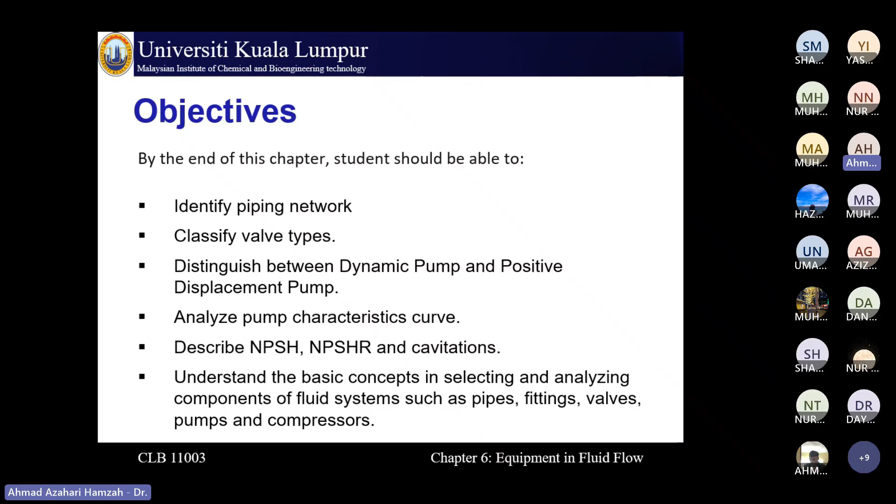Pipes are circular in cross-section and available in widely varying sizes, thicknesses, and materials of construction. Normally galvanized iron, PVC, and also stainless steel.

Pipes are used to transport fluid from one place to another.

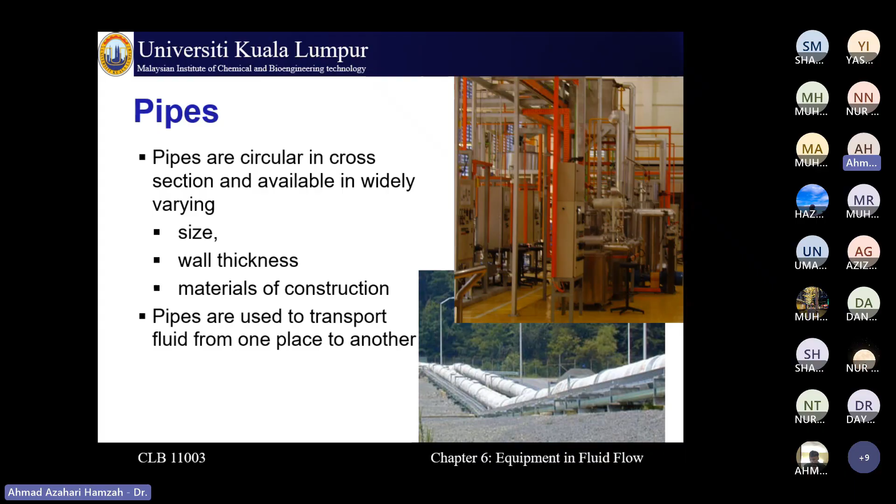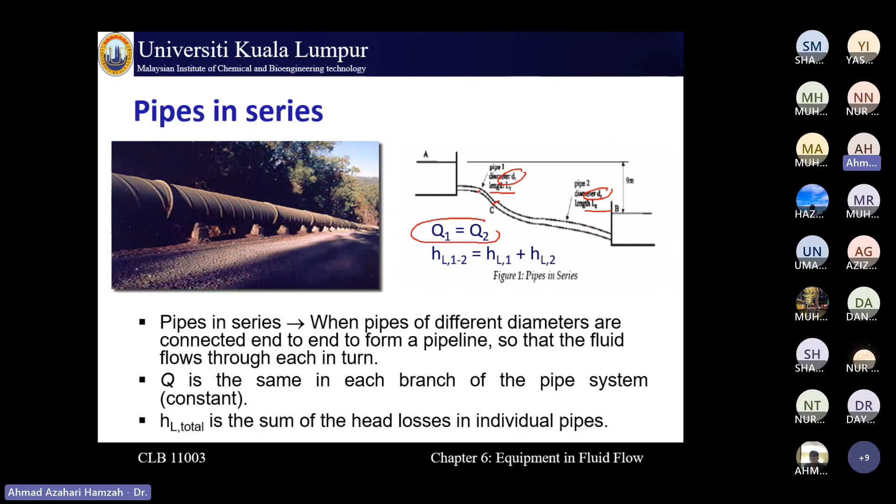Pipes in series: when pipes of different diameter are connected end to end to form a pipeline so that the fluid flows through each in turn. So we have pipe 1 with diameter D1 connected with pipe 2 with diameter D2, pipe 1 length L1, pipe 2 length L2. The flow rate Q is the same in each branch of the pipe system, where Q is constant, Q1 equal to Q2. The total head loss is the sum of the head losses in individual pipes: HL total equals HL1 plus HL2.

Pipes in parallel: when two reservoirs are connected by two or more pipes in parallel, the fluid can flow from one to the other by a number of alternative routes. So here we have two routes, pipe 1 and pipe 2, in a parallel configuration. Q total is the sum of the flow rates in the individual branches, so Q1 plus Q2 equals Q total.

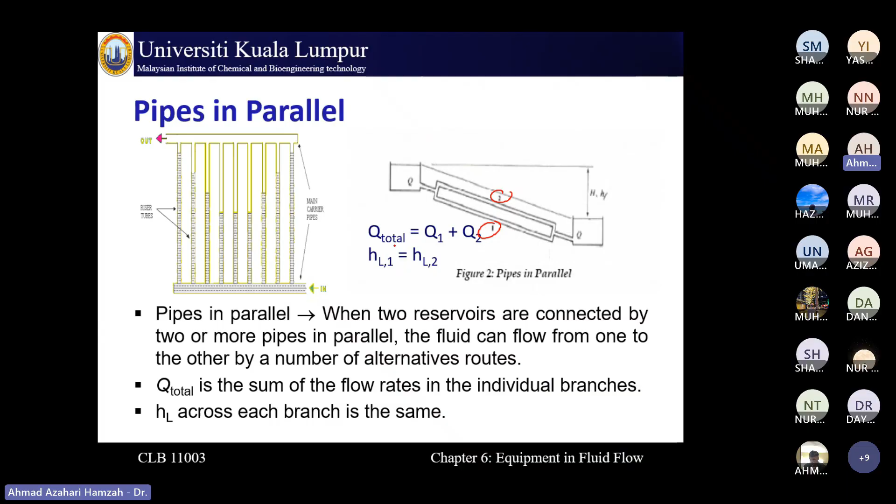And the head loss across each branch is the same: HL1 equal to HL2. Head loss for pipe 1 equals head loss for pipe 2, but the total flow rate Q equals Q1 plus Q2.

For the piping network with parallel pipes, we perform control volume analysis between point A and B. This is the Bernoulli equation: PA over rho G plus alpha1 UA squared over 2G plus ZA equals PB over rho G plus alpha2 UB squared over 2G plus ZB plus HL. The velocity at point A equals the velocity at point B, so we can cancel out UA and UB, and for the same elevation, ZA equals ZB.

In the end, we get HL equal to PA over rho G minus PB over rho G, or in short, HL equals delta P over rho G. Since delta P is the same for all branches, the head loss in all branches is the same, so HL1 equals HL2, where HL equals F times L over D times U squared over 2G — this for pipe 1, this for pipe 2.

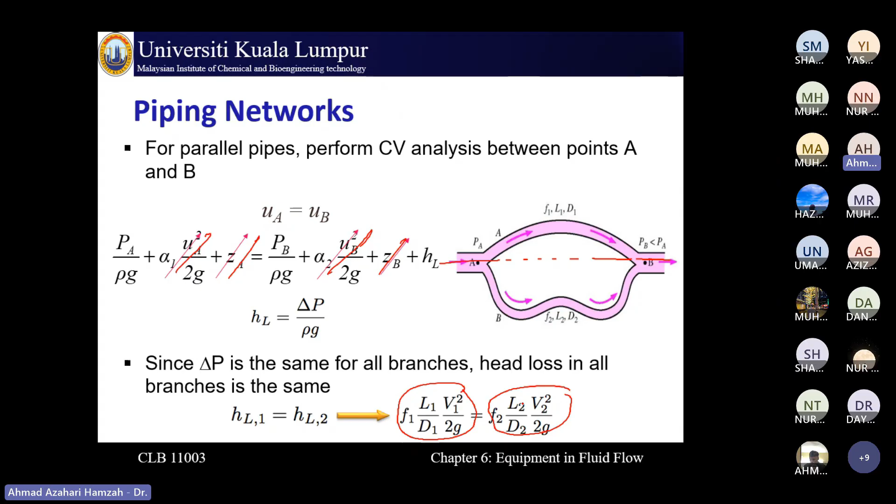Moving to the valve: a mechanical device that regulates the flow of fluid by opening, closing, or partially obstructing various passageways.

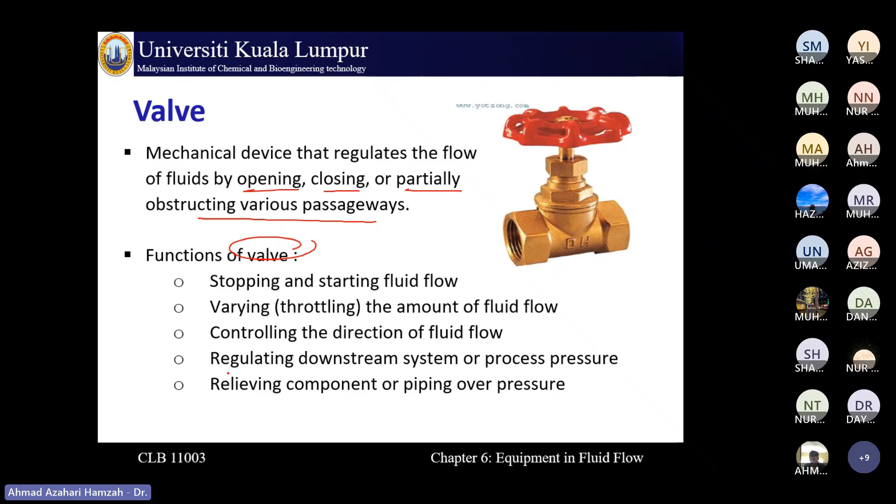Functions of a valve: stopping and starting fluid flow, varying or throttling the amount of fluid flow, controlling the direction of fluid flow, regulating downstream system or process pressure, and relieving component or piping overpressure. So we have two types of valves: stop valve and check valve.

Stop valve and check valve. A stop valve is used to shut off or partially shut off the flow of fluid, controlled by the movement of the valve stem.

A check valve is a mechanical valve that permits gases and liquids to flow in only one direction, preventing process flow from reversing. It's a one-way direction valve — fluid flows in the desired direction to open the valve, while backflow forces the valve closed.

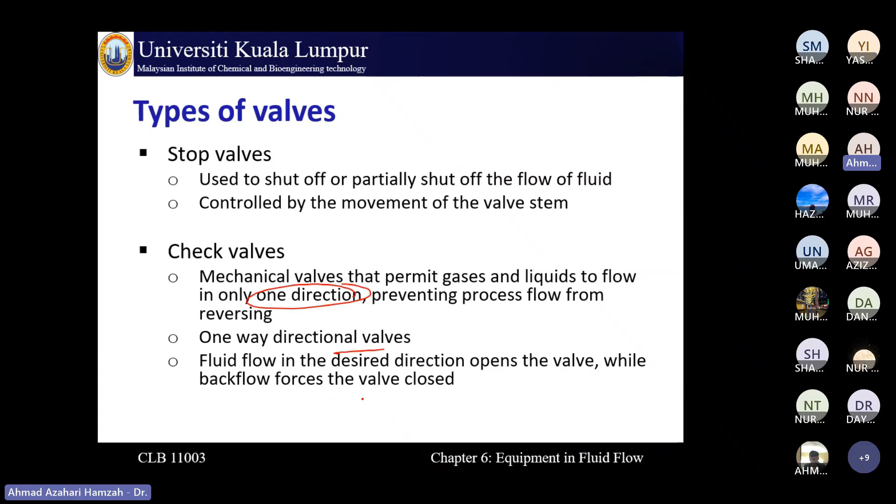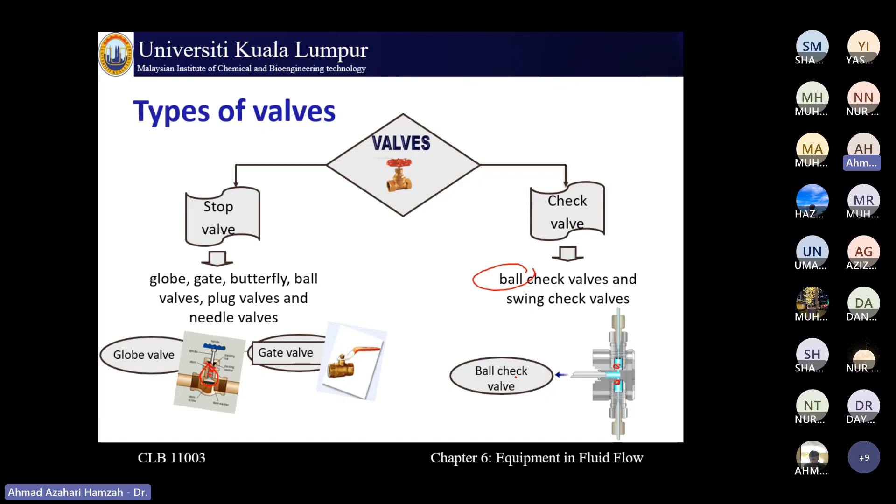A globe valve is a one-way direction, linear motion valve with rounded bodies, consisting of moving parts — the valve stem and hand wheel. Commonly used for on-off service and handles throttling applications, good for regulating flows.

Advantages of the globe valve: precise throttling and control, and high pressure limits. Disadvantages: low coefficient of flow, and it's not a good selection for applications requiring cleanliness or sterility.

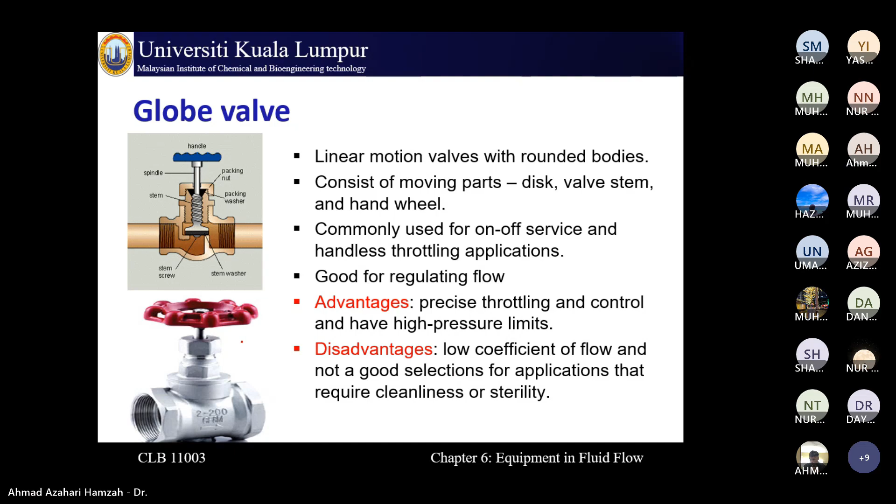A gate valve is used when a straight line flow of fluid and minimum restriction is desired. This is commonly seen at dams, mainly for on or off control with low pressure drop. Not suitable for throttling purposes.

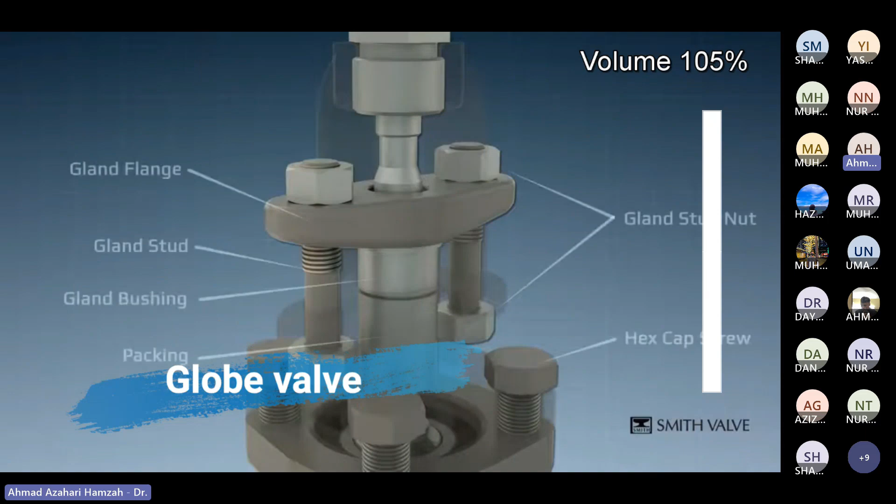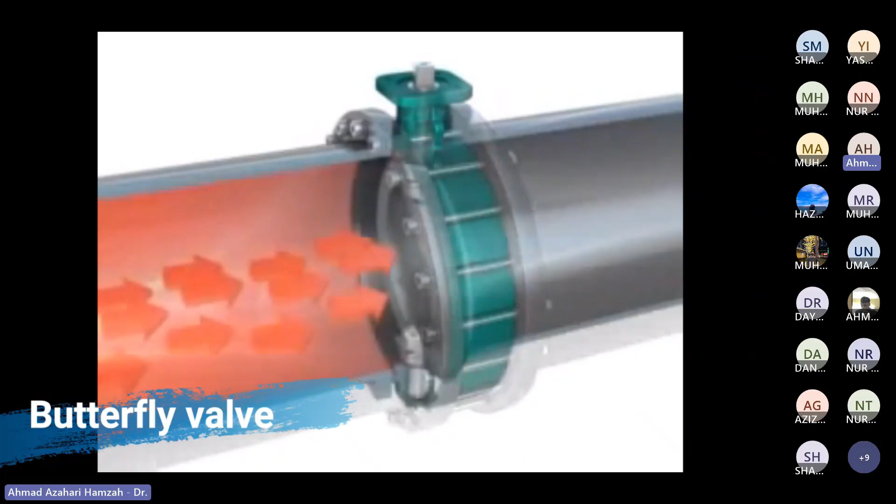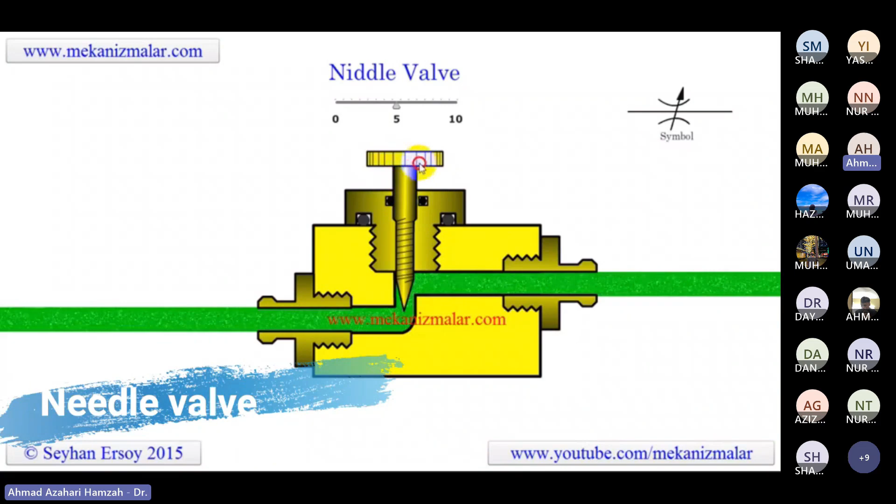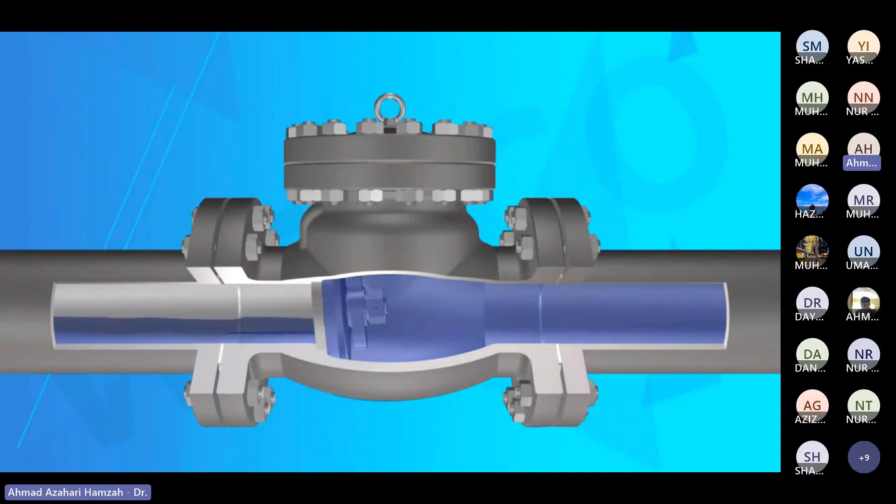This is a stop valve, so a globe valve is under the stop valve category. Okay, that is a type of valve.

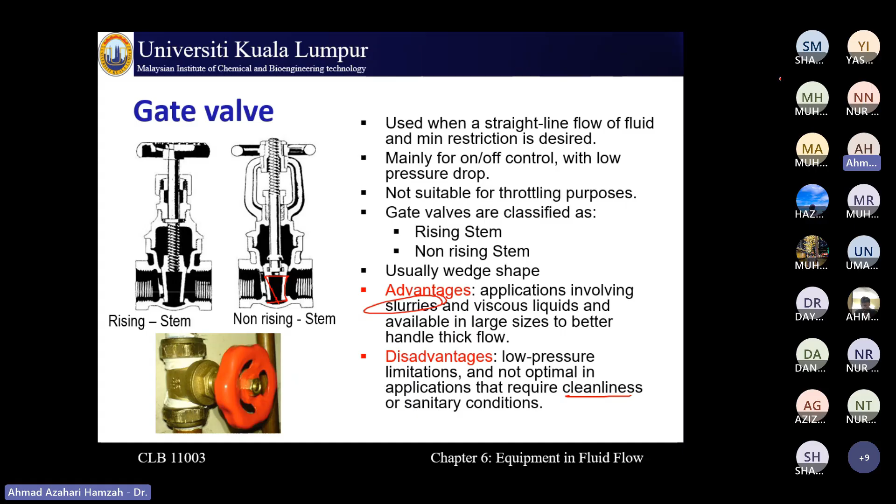Now move to the pump. Two types: dynamic pump and positive displacement pump. For dynamic, we have centrifugal pumps, and for positive displacement, we have plunger and gear pump. A pump is a mechanical device that moves fluid by pressure or suction.

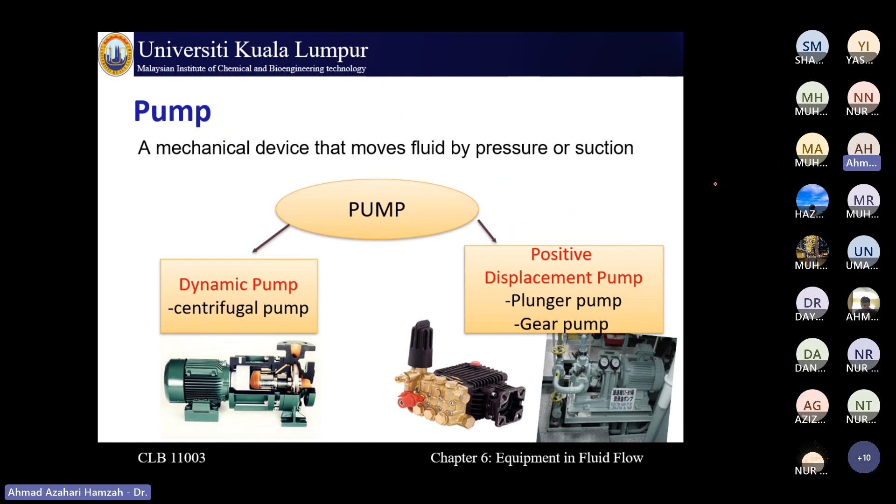It uses the momentum of the fluid to move it across an unsealed chamber. We have 3 types of dynamic pump, including centrifugal pumps. Fluid enters axially and discharges radially - that one is the centrifugal pump.

Axial pump: fluid enters and leaves axially, going in and out the same way. And mixed flow pumps: fluid enters axially and leaves at an angle between radial and axial, so it comes out at that angle - that one is the mixed flow pump.

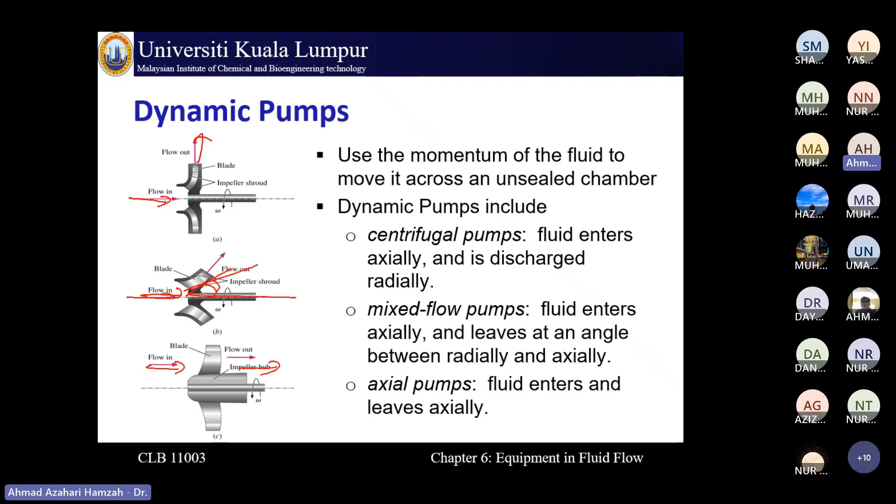Two main parts for centrifugal pump: rotating element which moves - impeller and shaft, with the shaft holding the impeller. And stationary element, we have casing, stuffing box, and also bearing.

Suitable for low viscosity fluid that can withstand a moderate amount of shear. That is why in our lab we use water. So normally we just use the centrifugal pump, except for experiment number 6, where we have gear and plunger pump, but still have the centrifugal pump as well. For the rest, normally we use centrifugal pumps.

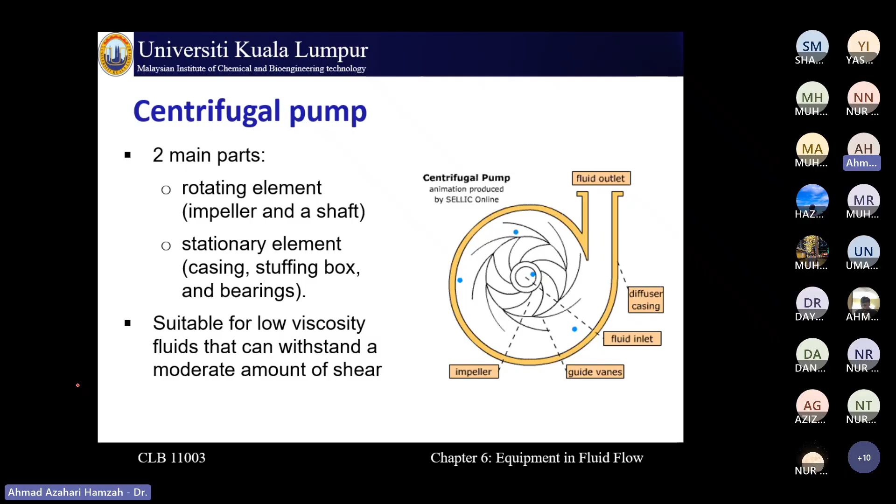Operating principle: operates using kinetic energy to move fluid, utilizing an impeller and a circular pump casing. The impeller produces liquid velocity and the casing forces the liquid to discharge. Liquid enters, the impeller spins until it hits the vanes and goes out. It enters the pump near the center of the impeller and moves outward by the rotating motion. The vanes on the impeller progressively widen from the center of the impeller, spinning further out until it exits.

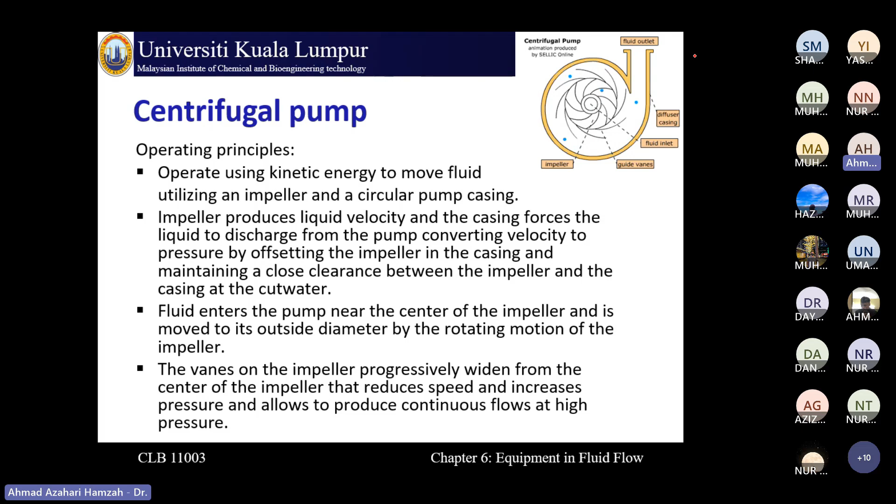Positive displacement pump forces fluid from one sealed chamber to another with little leakage. Examples of positive displacement pump: rotary and also plunger. Rotary is the gear type, which is used in experiment 6, both pumps. Suitable for higher viscosity liquid or when pressure requirements are high. That is why for experiment 6 we use water, and next we have oil in the tank.

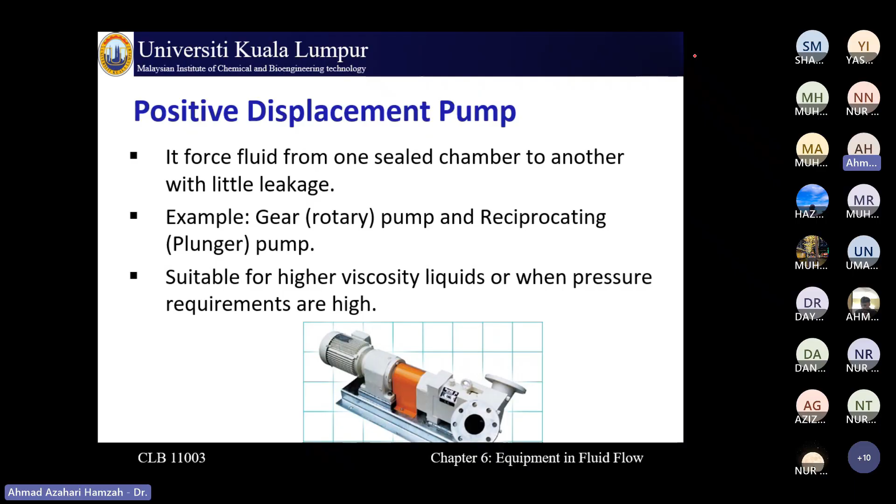Alright, gear pump operating principle: uses two identical gears rotating against each other. One gear is driven by a motor, and in turn it drives the other gear. So only one uses the motor, the other moves because it is being driven.

Each gear is supported by a shaft with bearings on both sides of the gear. There's a shaft, there's a bearing - without the bearing, it can't move. As the gears come out of mesh - this mesh we call a cavity -

they create an expanding volume on the inlet side of the pump. Liquid flows into the cavity and is trapped by the gear teeth as they rotate - gear teeth, cavity, and so on. Liquid travels around the interior of the casing in the pocket between the teeth and the casing, and finally, the meshing of the gears forces liquid through the outlet port under pressure.

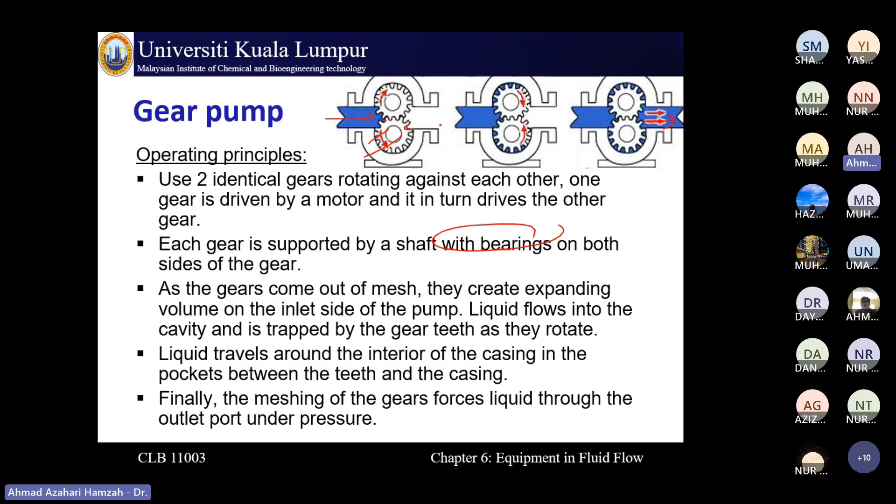It goes in, then goes out through here. This is the function and operating principle for gear pumps - this is how it operates: going in, moving to the teeth, and going out.

Reciprocating pump uses a plunger to move the media through a cylinder chamber. That's why it's called a plunger, reciprocate. We have a cylinder chamber here. It draws in fluid when the plunger rod retracts into the cylinder bore, and discharges the fluid when the plunger rod extends.

When it's pulled, it opens, water goes in, once full, it closes, water comes out. There's a valve here, and another one to open, with a ball. When the plunger is pulled out and increasing volume is formed within the cylinder, the ball check valve at the inlet port allows fluid to enter and fill this void.

After the cylinder is filled, the plunger is pushed in, pushed back, and the ball check valve at the inlet closes, while the ball check valve at the outlet port unseals or opens. A decreasing volume is formed within the cylinder. This action positively ejects the fluid out of the outlet port. So it goes in, opens, fills up, closes, then the other one opens and it comes out.

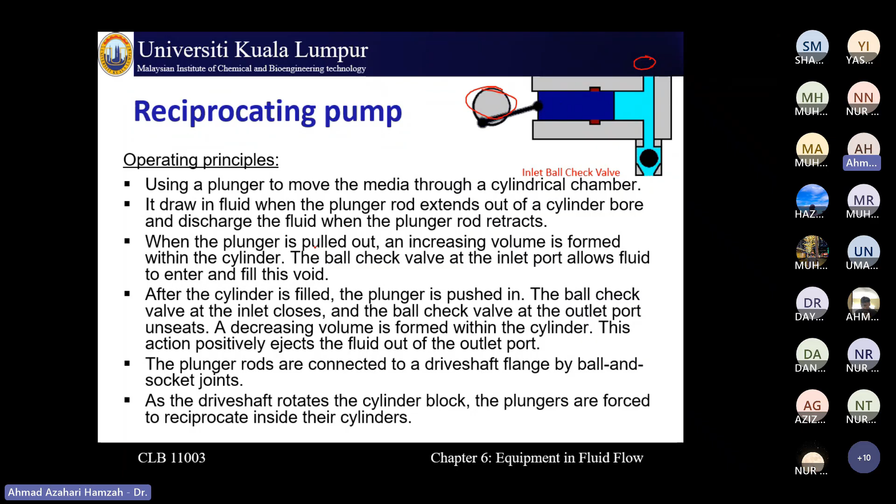The plunger rod is connected to a drive shaft flange by ball and socket joint. This drive shaft has a ball and socket joint holding the rod. As the drive shaft rotates the cylinder block, the plungers are forced to reciprocate inside their cylinders.

There are two types of pumps: reciprocating and centrifugal pumps. Advantages of reciprocating pump over centrifugal: it can be designed for higher head than centrifugal pump.

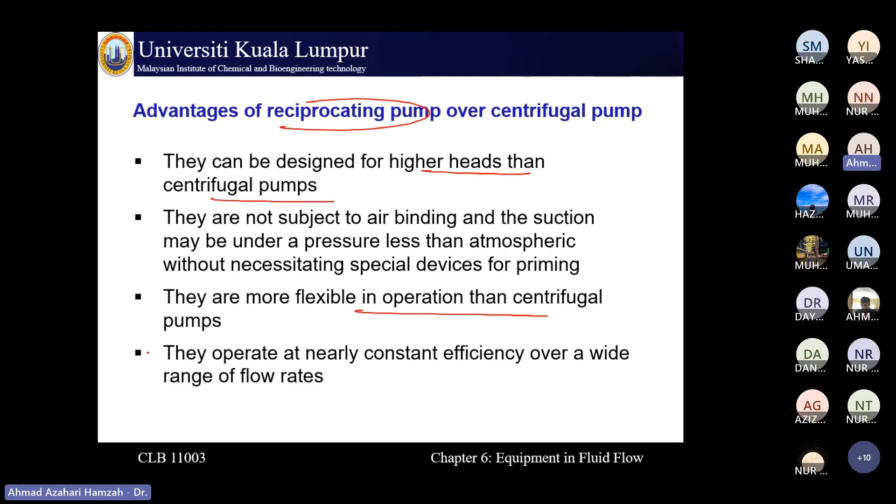They are not subject to air binding, and the suction may be under a pressure less than atmospheric without necessitating special devices for priming. They are more flexible compared to centrifugal pump and operate at nearly constant efficiency over a wide range of flow rates.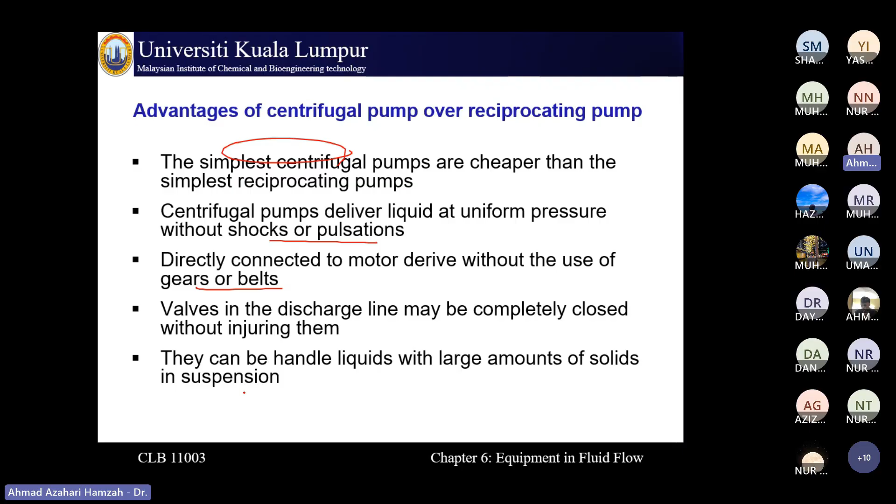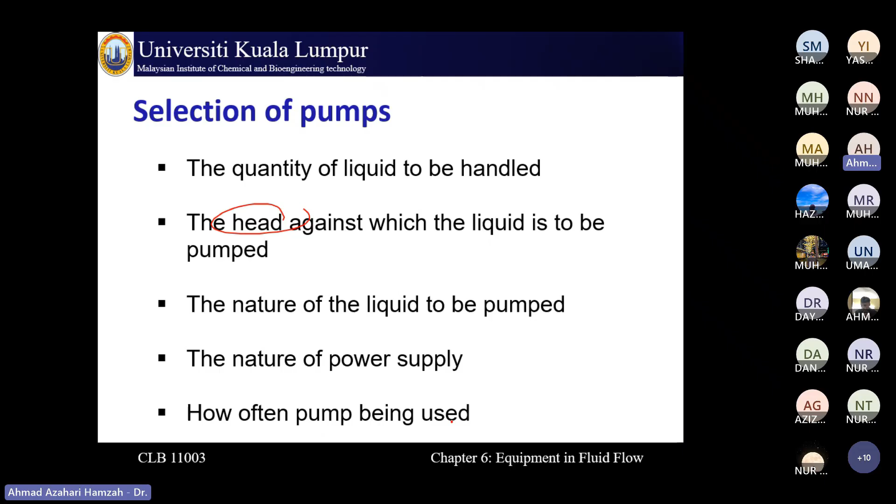Before selecting a pump, you need to understand the quantity of liquid to be handled, the head against which the liquid is to be pumped (height), the nature of the liquid to be pumped, types of liquid, whether slurry, for wastewater or normal use, the nature of power supply - AC, DC, etc, sometimes blackout and so on, and how often the pump is being used. For 24 hour use it needs to be heavy duty.

Next is performance characteristic curve. The delivered Q is dependent on P, delta P over Q. If the required pump P is high, the resulting Q will be low. High delta P, low Q. If Q is high, the pressure is low. At low pump P, the Q is high.

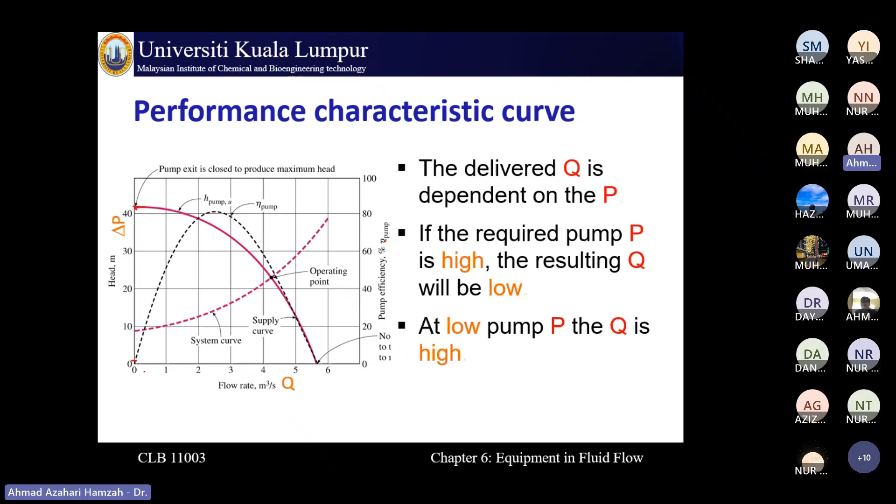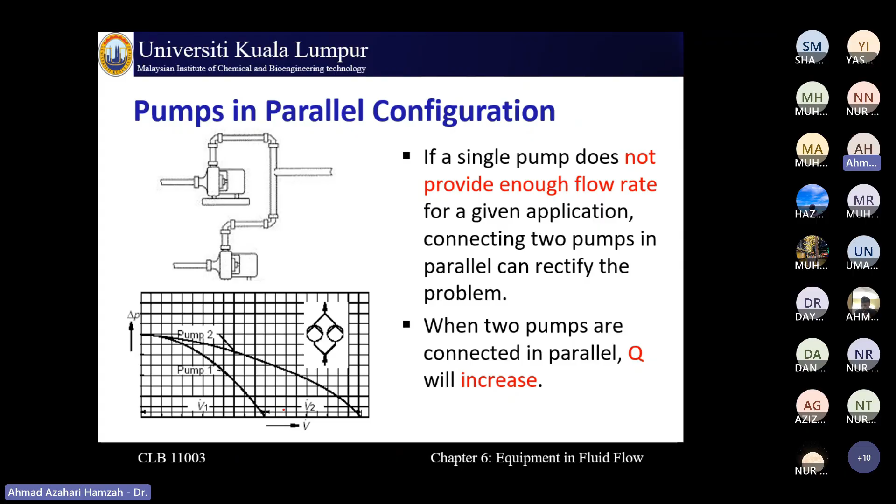Pump in parallel configuration: if a single pump does not provide enough flow rate for a given application, connecting two pumps in parallel can rectify the problem. So when two pumps are connected in parallel, Q will increase, flow rate will increase in parallel. For terrace houses, we use parallel pumps.

For series, if a single pump does not provide enough head for a given application, two pumps connected in series can be a remedy. When two pumps are connected in series, it's better for apartments or multi-story buildings like hostels, we need to use pumps in series to increase their head, if a single pump cannot do the job.

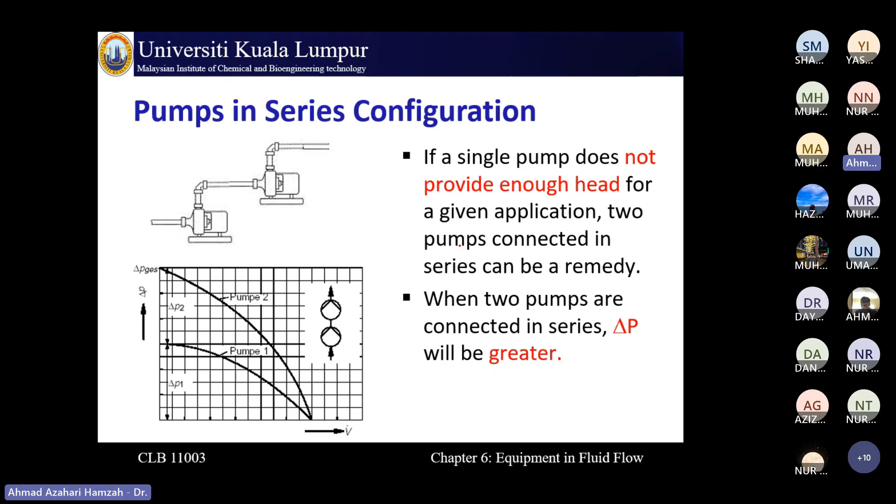Pump head: this is the Bernoulli equation for out and in. So H equals total out minus total in, energy grade line out minus energy grade line in. Energy grade line and hydraulic grade line - we already covered this in chapter 4.

Water horsepower equals mgh, mass flow rate, equal to rho g Q H. M is rho Q, times rho g, times QH. Rho Q is the mass flow rate. Q is discharge, the volume flow rate.

This is also from chapter 3. Brake horsepower, BHP, equals W shaft equals omega T shaft. And we can calculate pump efficiency, pump eta is efficiency equal to rho G QH, water horsepower divided by brake horsepower. So we get the efficiency of pumps.

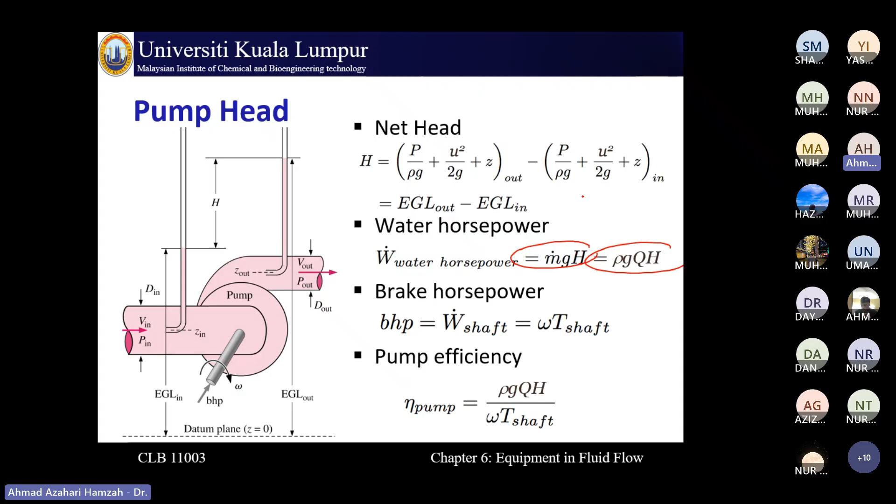Alright, so pump head: we have two reservoirs, reservoir 1 and reservoir 2, point 1 and point 2. Point 1 and point 2 are at the free surface, so P1 equals P2 equals PATM. Then for gauge, P1 equals P2 equals 0. So we can cancel out P1 and P2. U1 equals U2 because the piping is too small compared to the reservoir.

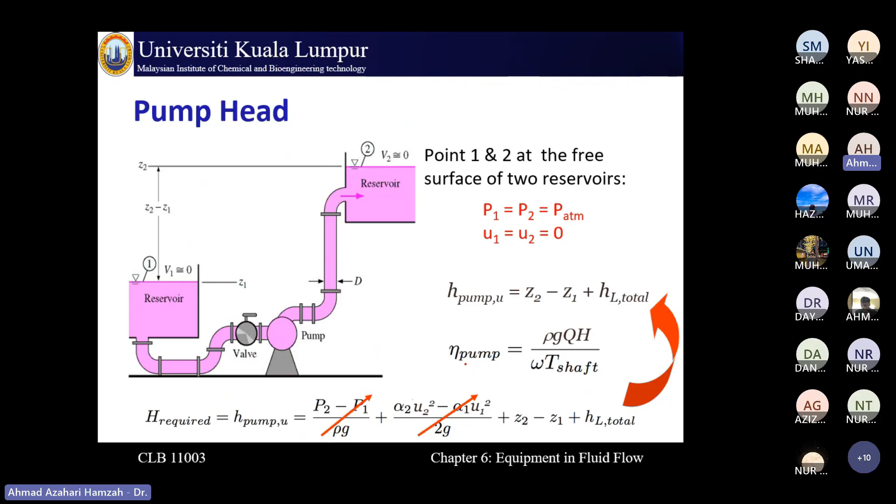Net positive suction head, NPSH, you will learn later on in the PNIC course in detail. So for fluid mechanics, we just give you a surface view about the pump, valve and so on. Later on in PNIC, insyaAllah, you will learn in detail. You will learn how to read P&ID, piping and instrumentation diagram, with pumps, instruments and so on.

So net positive suction head, NPSH, is the difference between the pump inlet stagnation pressure head, remember this is stagnation pressure from the Bernoulli equation, minus the vapor pressure head. Net positive suction head required, NPSHR, is the minimum NPSH necessary to avoid cavitation in the pump. So NPSH should be higher than NPSHR, and no cavitation occurs in the pump if this condition is satisfied.

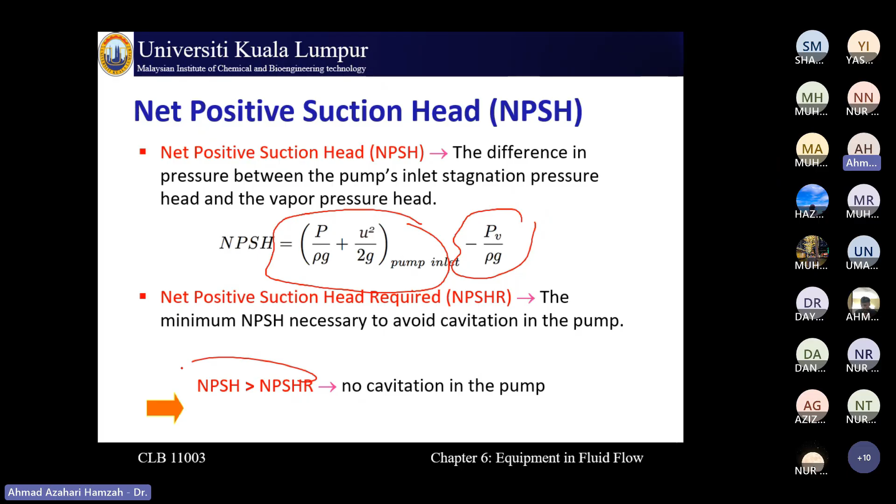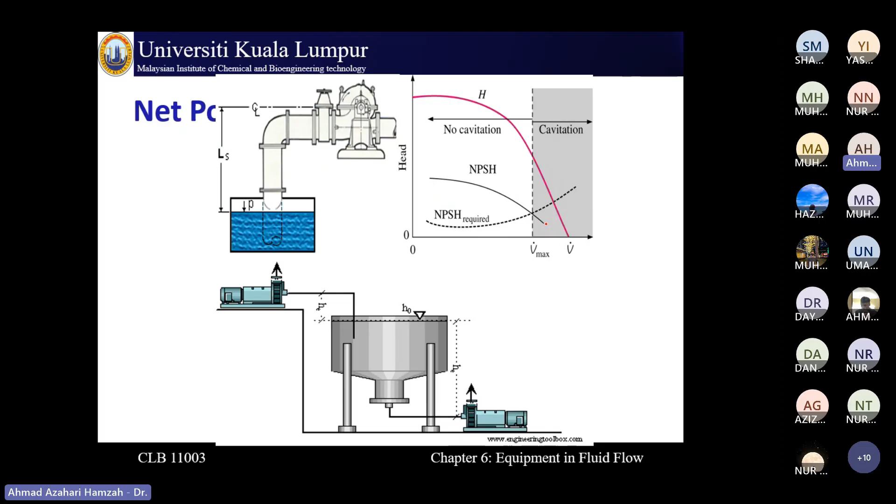Okay, so cavitation is the formation of an air or vapor pocket bubble due to lowering pressure in a liquid. Ada bubble-bubble dalam tu, pump kita boleh rosak lama-lama. It occurs when the pump suction is under a low pressure or high vacuum condition where the fluid turns into a vapor bubble at the inlet of the pump. It should be avoided due to erosion, damage and noise.

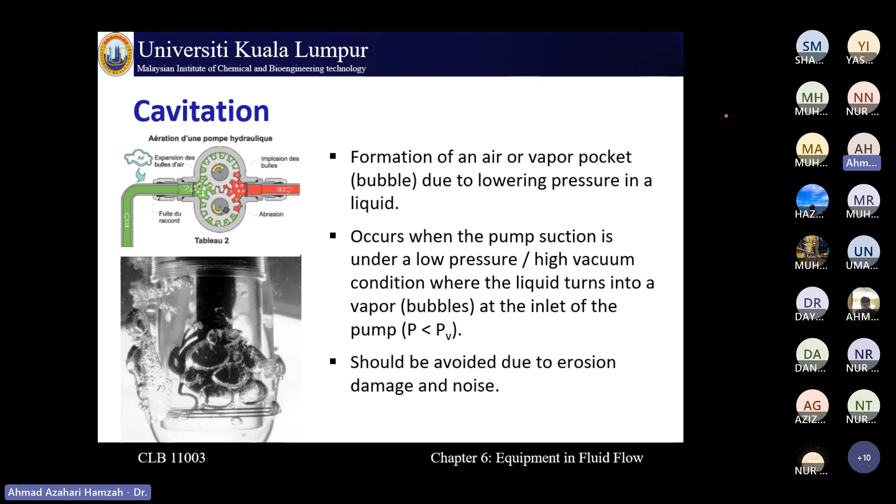Okay, cavitation. When cavities form at the suction of the pump, several things happen. A loss in capacity, it cannot take in as much fluid into the pump. It no longer builds the same head pressure. It drops the efficiency and causes noise, vibration and damage to many of the pump components. So that is why we need to avoid cavitation.

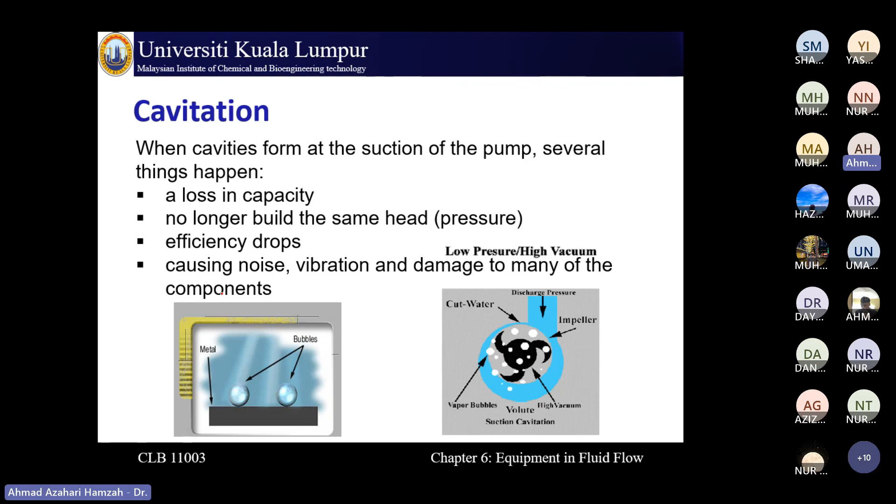Alright, next is the last one, the compressor, a device designed to compress air or gas from a low inlet pressure to a higher outlet pressure. Compressor ni akan ada eksperimen dalam thermodynamics. Next semester, if not mistaken, you will take the thermodynamics course.

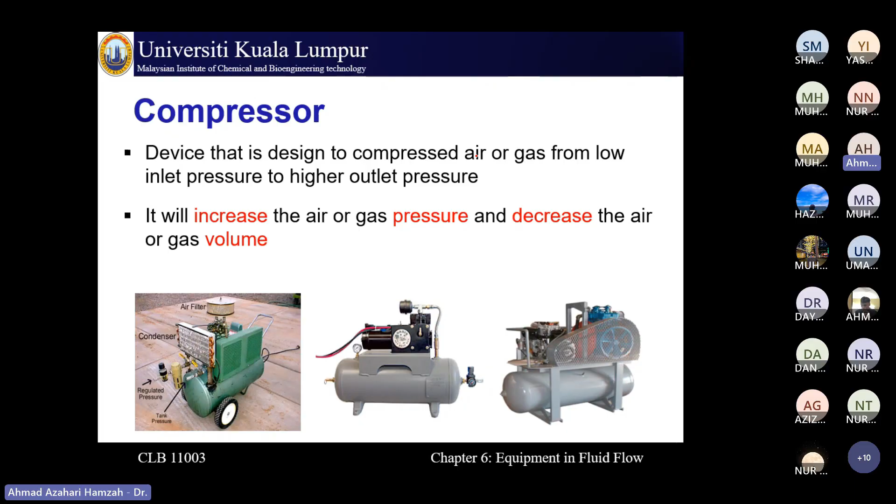How it operates: it will increase the air or gas pressure and decrease the air or gas volume. That's the function of a compressor. Two types: dynamic compressors and positive displacement. We have rotary and also reciprocating.

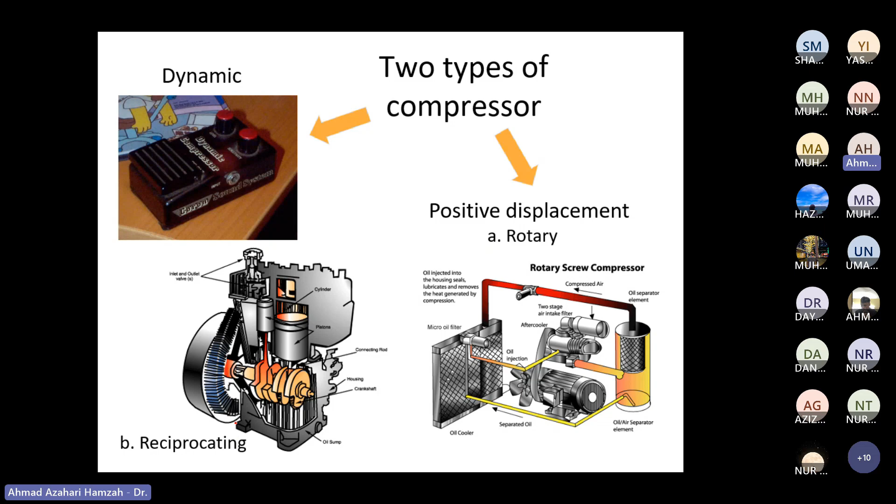Reciprocating compressor. I will show you a video later. Cylinder: a chamber where the compression process takes place by the change in its volume as the piston moves up and down. Piston: a component located inside the cylinder directly responsible for the compression of air. Crankshaft: converts rotational motion generated by the motor to unidirectional motion for the piston.

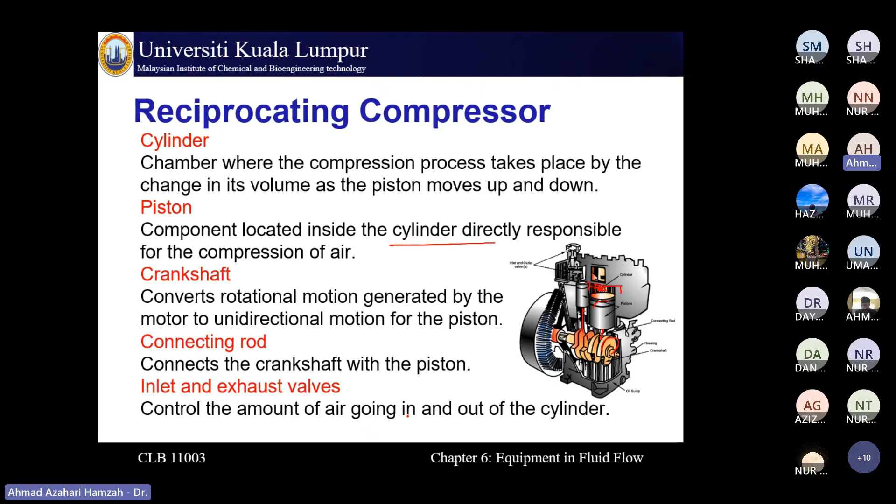We have the connecting rod, which connects the crankshaft with the piston, and the inlet and exhaust valves, which control the amount of air going in and out of the cylinder.

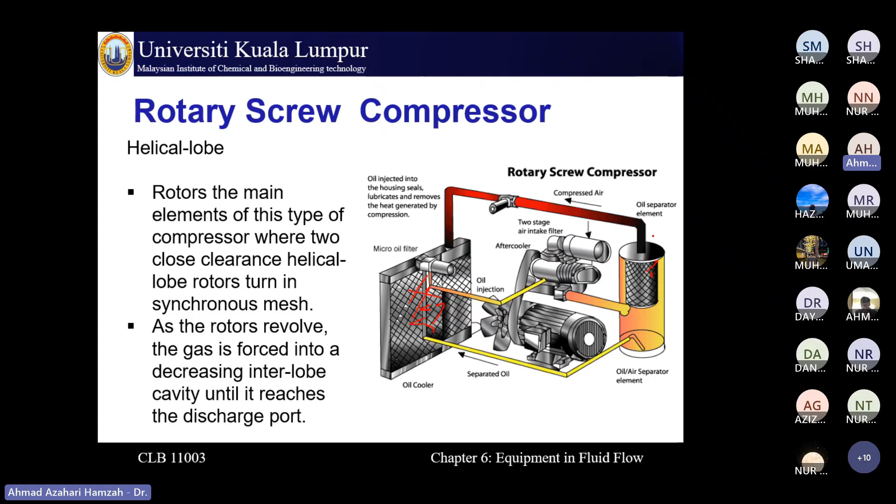Rotary screw compressor, helical lobe. After this, I will show you the video for the rotary compressor. The rotor is the main element of this type of compressor, where two close-clearance helical lobe rotors turn in synchronous mesh. As the rotors revolve, the gas is forced into a decreasing interlobe cavity until it reaches the discharge port. The red is high pressure, this is low pressure.

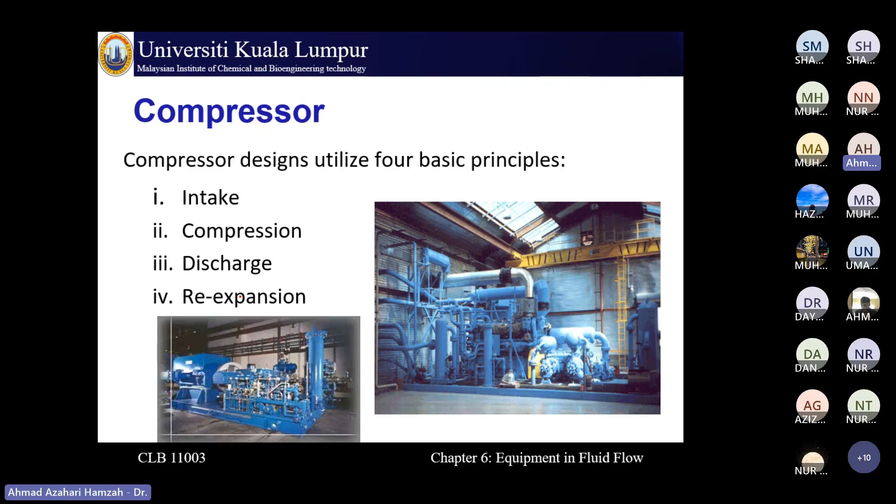Compressor design utilizes 4 basic principles. Before you design the compressor, you need to consider 4 basic principles: intake, compression, discharge and re-expansion.